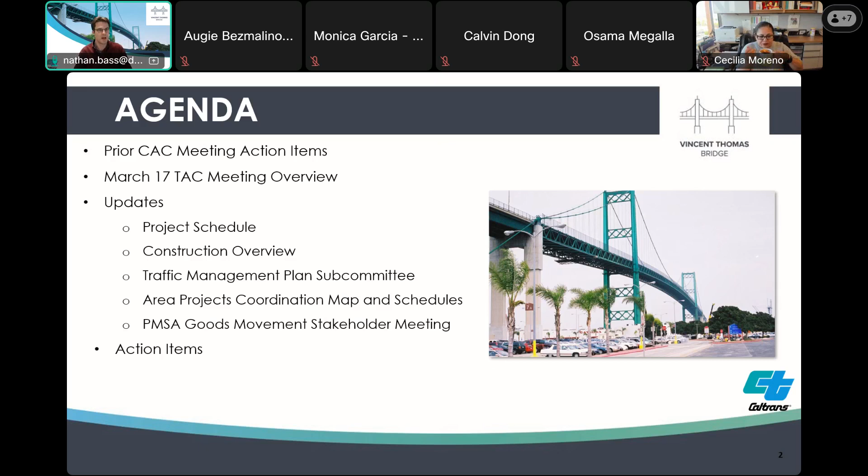So on our agenda tonight, we will do an overview of the previous CAC action items, as well as the last TAC meeting that we had back in March. As you'll remember, the TAC, or Technical Advisory Committee, is paused at the moment. As far as updates in our presentation tonight, we will discuss the project schedule, an overview of current construction and what's up ahead, updates from the Traffic Management Plan Subcommittee. We'll hear from Calvin Dong discussing the area projects, coordination map, and schedules. And I'll touch on the Pacific Merchant Shipping Association's Goods Movement stakeholder meeting series that is ongoing. We'll finish with the action items that are generated from this meeting.

The last meeting of the Community Advisory Committee did not generate any action items other than the normal uploading of minutes and recording to the project website.

The last TAC meeting back in March discussed several topics, including the open house series, which we concluded at the beginning of this month, the project schedule at that time, local street repairs that are planned for the project, the start of the pre-full closure construction, an overview of the construction schedule, again the Traffic Management Plan Subcommittee, project coordination map, and next steps for the TAC.

As I mentioned earlier, and as you are probably aware, the Technical Advisory Committee is on hold. It still exists, but we are not holding any meetings for that for the time being.

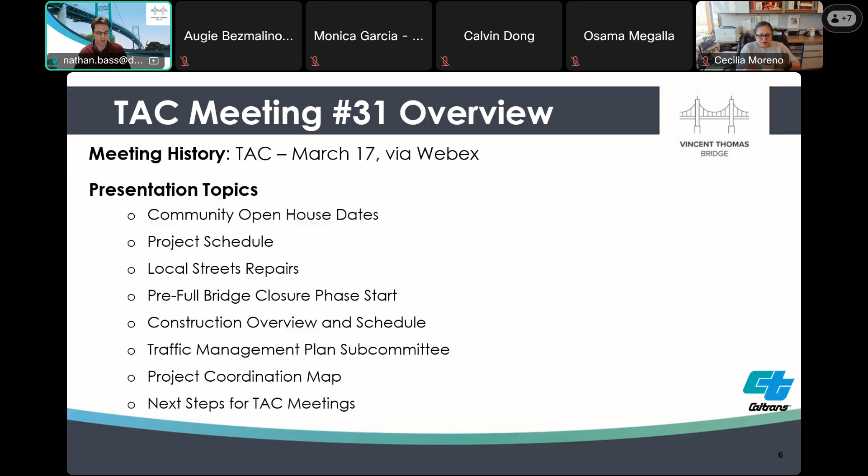So I'll ask Rimma to unmute and speak about the project schedule. Thank you, Nathan. So as you all know, Caltrans launched this project in February 2023 with the environmental phase completed in fall of 2024 and design phase completed in fall of 2025. We signed the construction contract with Skanska CEC joint venture this past January, and we're now fully into construction phase.

Construction work is divided into three parts: pre-full closure, full closure, and post-full bridge closure. Pre-full closure began in March, on March 23rd. We're currently on target to wrap this pre-full closure work by late October. The 16-month full closure remains set for November 1st, with the bridge scheduled to reopen in winter 27-28. Post-full closure is scheduled from winter 27-28 to winter 28-29.

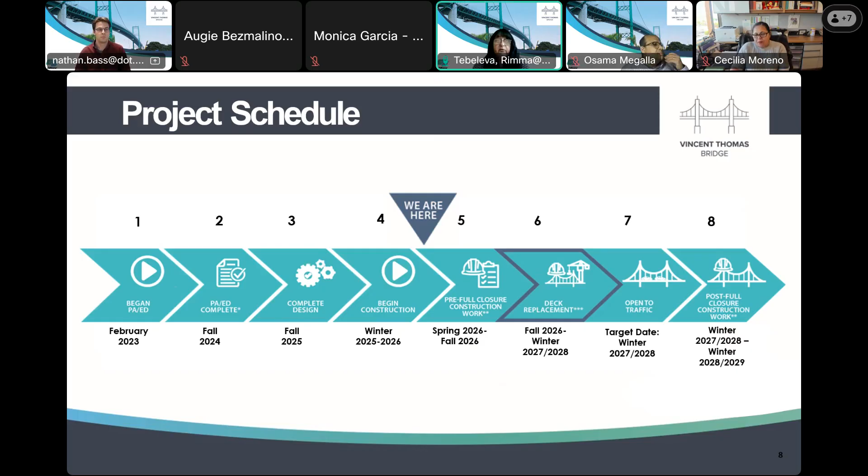And next is Andy Chen, our structure construction senior engineer, to talk in detail about all these activities. Thank you, Rimma. This is Andy Chen from Structure Construction Caltrans. For the next few slides, I'm going to talk about the construction, such as the stages and what kind of work we're going to do during each stage. So before I start, can everybody hear me fine? Diana, thumbs up? Thank you. All right, next slide please.

As Rimma mentioned earlier, there will be 3 stages for this project. The first one is the pre-full closure stage, for the preparation work. It will start from March 2026 to October 2026. At this moment, we already started this stage. The next stage will be the full closure stage, for the deck replacement. That will be from November 2026 to February 2028.

The last stage will be the post-full closure stage, from March 2028 to March 2029. The project contractor will be Skanska CEC joint venture. Due to the magnitude of this project, we need 2 contractors working simultaneously, and they are great contractors. Next slide, please.

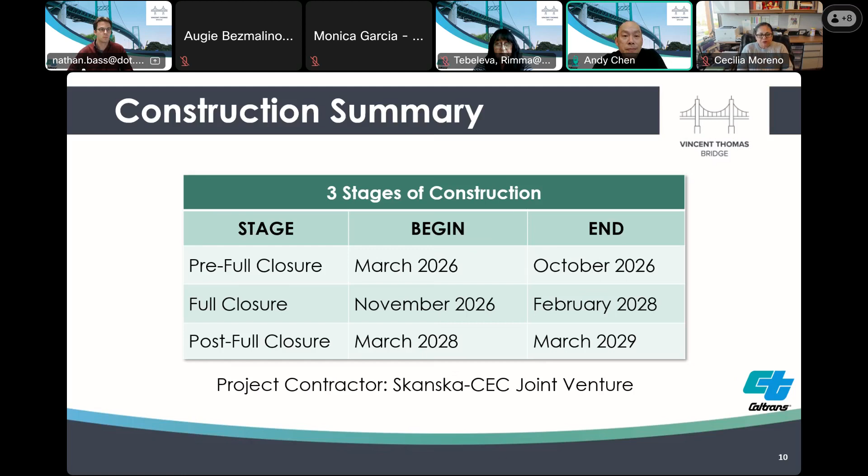So, okay, got it. Here are some of the major work we are going to do during the pre-full closure stage. It's from March 23rd, 2026 to October 30th, 2026. The first thing we're doing right now is installing the protective shielding.

The purpose is to protect the people and waterway underneath the bridge. Next stage, we will install the work platform immediately under the deck, so the worker has better access for the work.

We already installed 2 temporary stair towers as extra access points to expedite the work. Then we are going to install structural bracing, mainly to ensure the stability of the bridge, especially after the deck is removed.

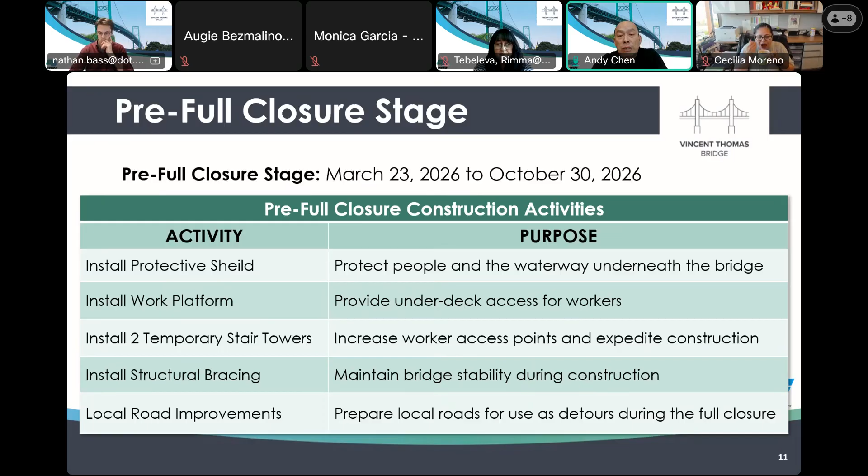Last but not least, we're going to resurface the local street for the detour route. Next slide, please.

So what kind of impact are we looking for during the pre-full closure stage? We will have overnight one-directional bridge closures from Sunday night to Friday morning. The week of March 23rd was Monday to Friday.

Westbound will be from 10:45 p.m. to 6:45 a.m., and eastbound will be 10:15 p.m. to 6:45 a.m. There will also be potential weekend bridge closures, depending on progress.

And local road will be closed for the resurfacing from mid-July to October 30th, 2026. We will provide closure notifications through email. Next slide, please.

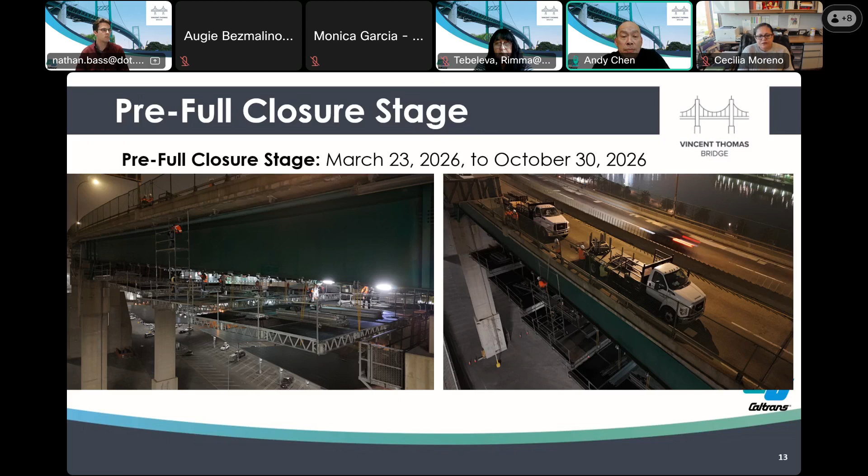As I mentioned before, we are going to assemble the protective shielding on the bridge deck. Once we reach a certain area, we will lift it with a crane, swing it outside the bridge, and hang it underneath. That's the actual picture of the work we are doing right now.

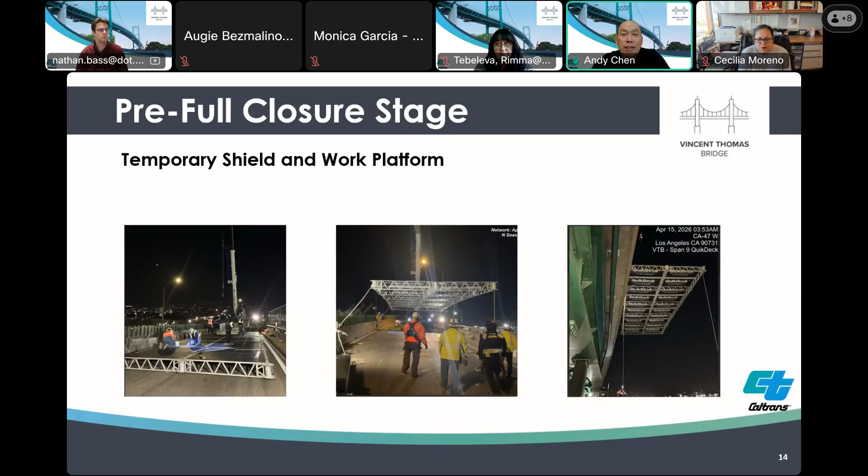This is what we have right now, looking under the bridge. Those are the protective shielding panels that we're installing at this stage. Next slide.

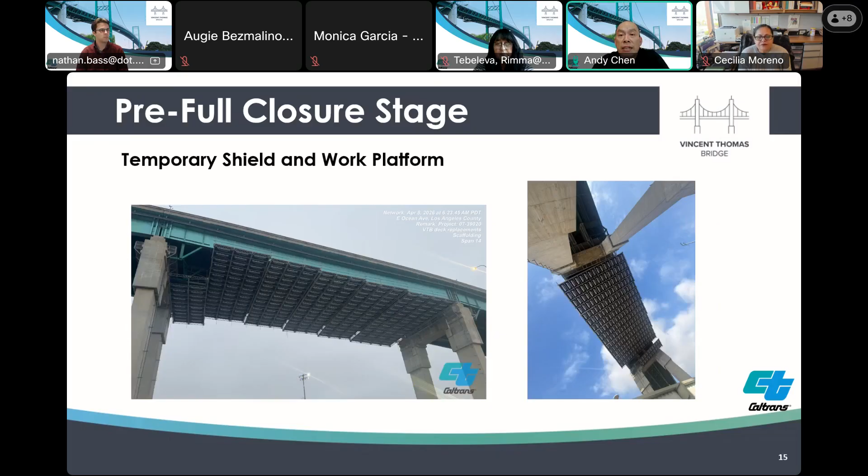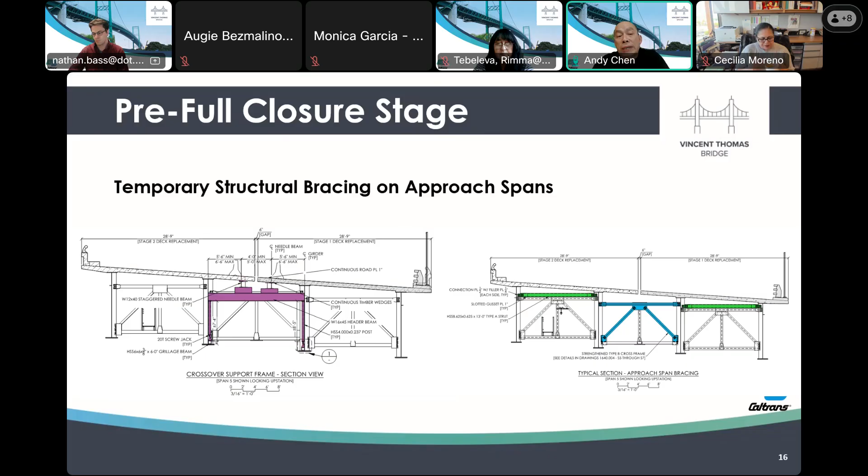As mentioned earlier, we are going to install the temporary structural bracing. The main purpose is to ensure the stability of the bridge, especially after the deck is removed. In the second half of this year, you'll see the actual bracing installed on the bridge. Next slide, please.

And we will finish all this before the full closure starts. Next slide, please.

So that was for the pre-full closure work. As for the full closure stage, as mentioned earlier, it will start from November 1st, 2026 to February 28, 2028. That will be 16 months.

During full closure, the entire bridge will be shut down to traffic, and we will focus on the deck replacement work. This will be 7 days a week, 10 to 12 hour shifts per day. Next slide, please.

These are the major work items during the full closure stage. We are going to replace the bridge deck, reconstruct the bridge railing, reconstruct the median barrier, reconstruct the drainage, replace the seismic sensor, and reconstruct the overhead signage. All of this work will be finished within 16 months.

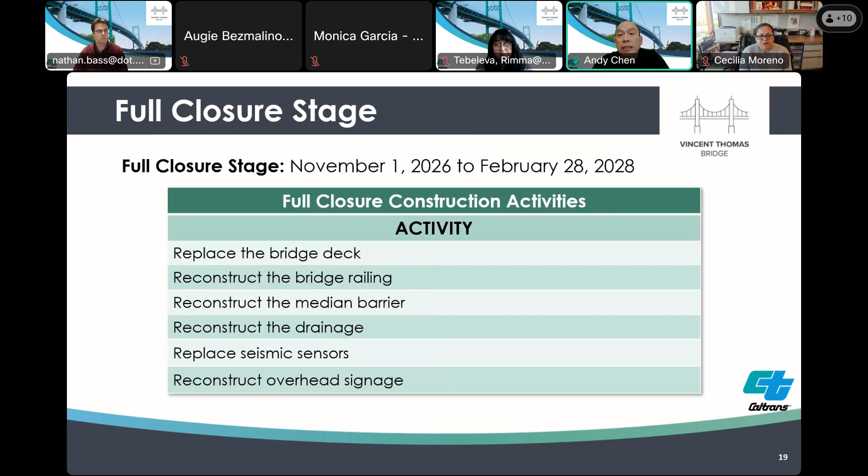Next slide, please. That was for the full closure stage. So right now we're talking about the post-full closure stage. This is the last stage of construction, starting from March 2028 to March 2029.

There are two types of work under this stage: permanent work and temporary work. For the permanent work, we're going to install the permanent under-deck utility supports, handle utility on those permanent supports, complete some punch list items, and install a new drainage system at the seismic joints.

As for the temporary work, we are going to remove everything installed during the pre-full closure stage, such as the protective shielding, access platform, stair towers, and the temporary structural bracing. Those are the work items for the post-full closure stage. Next slide, please.

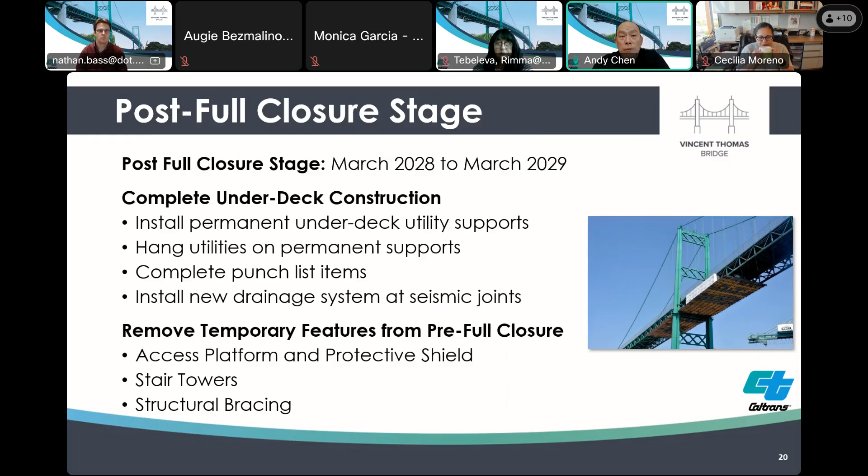As for the impact during the post-full closure stage, it will be similar to the pre-full closure stage, starting from March 2028 to March 2029. We will have overnight one-directional closures on weekdays. Westbound will run from 10:45 p.m. to 6:45 a.m., and eastbound from 10:15 p.m. to 6:45 a.m. So everything is exactly the same as the pre-full closure stage.

We also might have a potential weekend closure, depending on the progress of the project. Next slide, please.

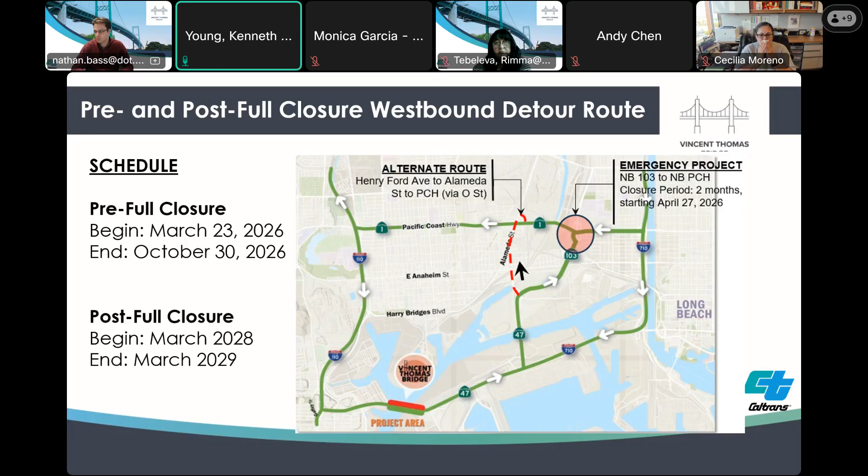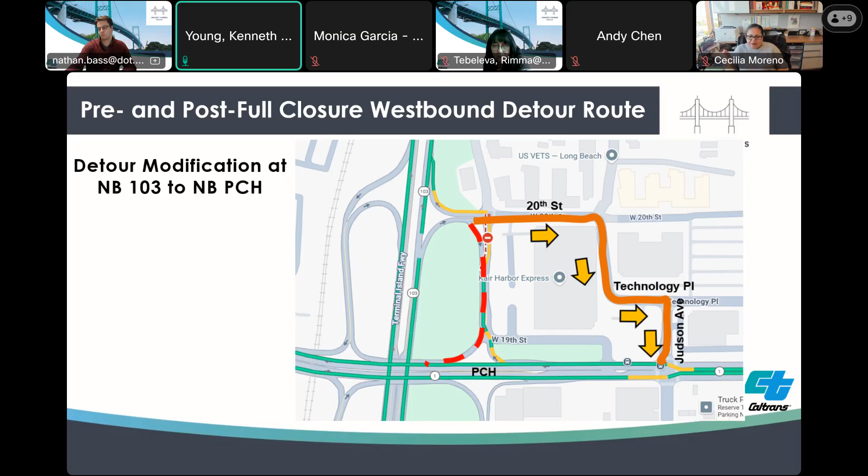As I mentioned, there will be a portion of the main line between these two - the northbound off and the northbound on - that will be closed for a duration of 1 month. And this connector will be closed for a period of 2 months starting this Friday. There's messaging out there in the field in terms of portable changeable message signs to speak of the work and the period of work. Next slide.

Once we finish work on the westbound end, then we'll transition to the eastbound. So in order for motorists to go from the San Pedro side to the Terminal Island and Long Beach side, they would utilize the 110 to PCH, to 103, to 47. The transition from eastbound PCH to 103 will not be impacted like the other side is.

In terms of the other side, I failed to mention that the emergency repairs relate to girder work - I think there was a vertical clearance issue where a truck hit a girder, which necessitated the repair. But in terms of the eastbound closure detour: 110 to eastbound 103, to 47, to Terminal Island, and beyond that motorists could take PCH eastbound all the way to the 710 and go to Long Beach or beyond.

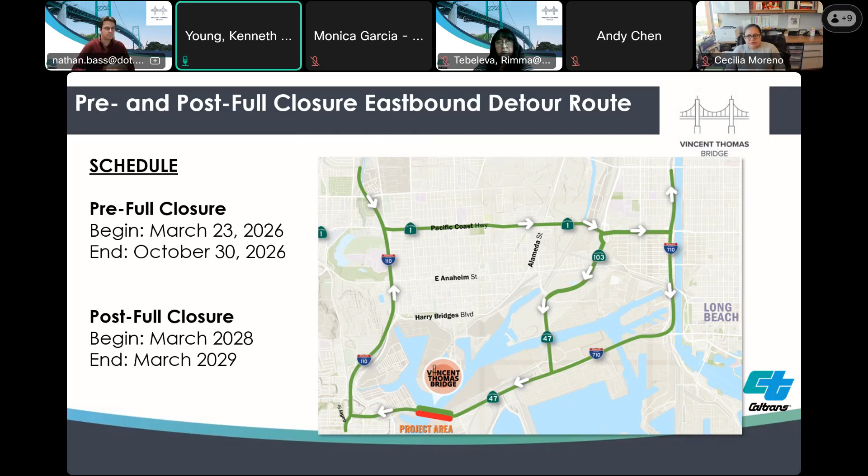Next slide. In terms of the full closure detour that will take place effective in November, the original detour was Harry Bridges, transitioning to Alameda, Anaheim, Henry Ford, and south on 47 to Terminal Island. We have extended that and provided an alternative route.

That route goes along Anaheim Street to 103. So one transitioning from Anaheim to southbound 103 can travel down the 103 to the 47 without any interruption, particularly to railroad operations, which will be a challenge in that area in terms of operations. Hopefully this alternative route, this extension, will help facilitate travel in the area. Next slide.

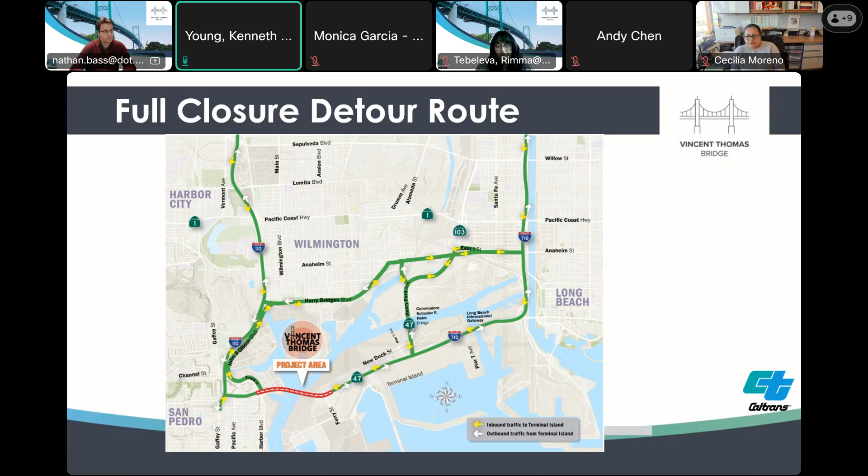In terms of traffic control officers, we have 18 locations. The plan remains, in collaboration with the city, to provide a full force of officers for the first 2 to 3 months, which will address the project impacts upon closing.

This will carry through to the peak period the port has as early as January. The city has put forth a motion to go beyond that, but we have a good plan, with some fluidity in terms of traffic control officers at the priority locations surrounding the detour. There may be ebbs and flows in location and shifts of traffic as we move forward in those first few months, so we'll remain adaptable to moving officers wherever needed.

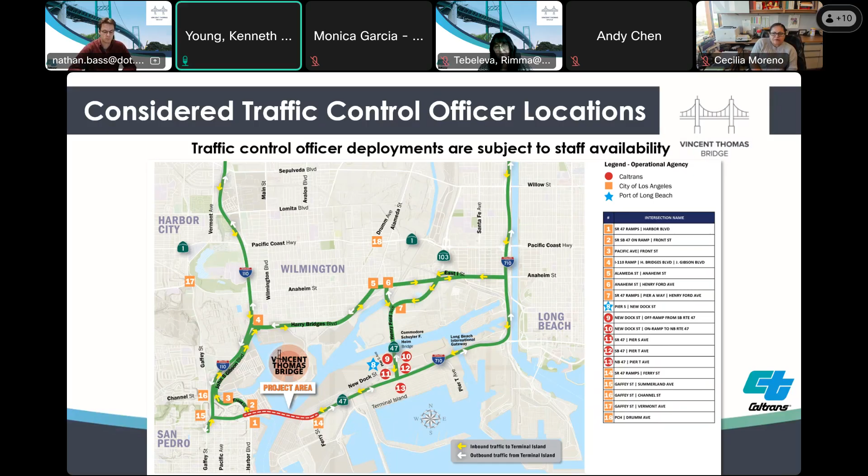In terms of local road improvements, expanding on what Andy mentioned, we will be providing capacity increasing improvements along the detour, in particular an additional eastbound lane on Harry Bridges Boulevard between the 110 and Access Road, just east of the TraPac building. We'll also be adding an eastbound lane on Anaheim Street from Alameda all the way to Farragut, connecting to the existing three lane section of Anaheim that carries easterly to the 710, providing a lot of continuity.

Additionally, we're taking the opportunity to provide additional storage where needed, in particular on westbound Anaheim at Alameda left turn movement, where we're increasing storage in anticipation of additional demand once the full closure arrives. Next slide.

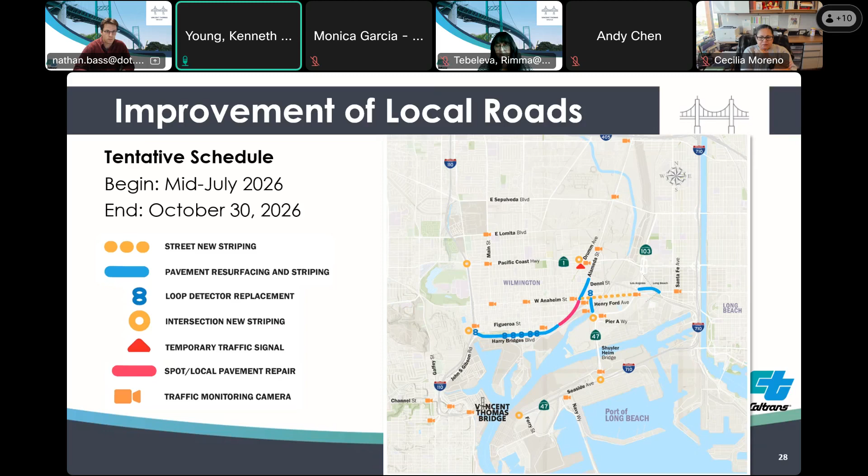In terms of camera locations, the existing locations are represented in black, and we've made tremendous strides, getting to the point where we're at 90% health. If you utilize our Quick Map app, our project app, in many of those locations we've represented still camera shots at time intervals at each location.

We've progressed to providing live stream video on many of these cameras, so you're able to see live feeds. Beyond that, our construction team has assisted us in installing what we're calling Earth Cam cameras, represented in magenta, in or about the areas, which will help us provide the necessary traffic surveillance.

Before that full closure arrives, in coordination with the city, we'll be able to install many of the cameras that are in orange, so we'll have a more global look at the area of impact.

Above and beyond that, we'll have what we call AWIS, the Automated Work Zone Information System, that will allow us to detect traffic conditions and change the messaging to motorists in real time. So we'll be able to tell motorists there's traffic jammed ahead, use an alternate route, or whatever it may be, so motorist travel interruptions are minimized.

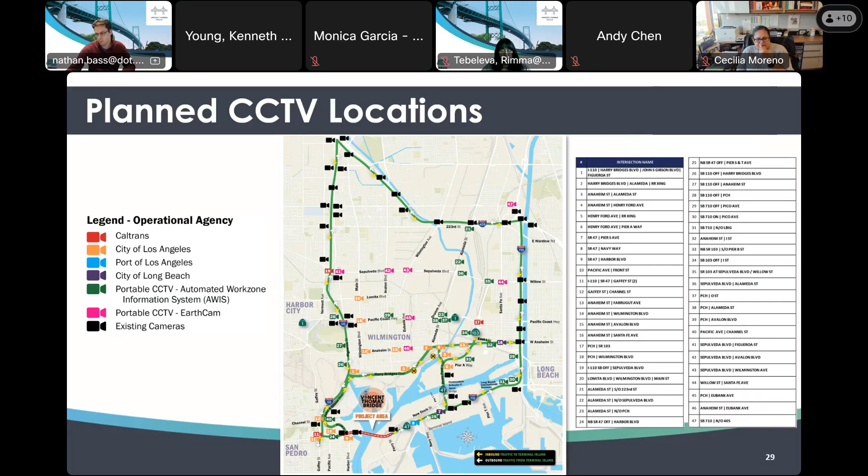Next slide. I think that may be it. Back to you, Nathan. Thank you, Ken.

I wanted to say I saw Augie's hand come up right at the end of the construction schedule overview, when Ken was getting started. So if you had a comment or question, Augie. Yes.

The first gentleman talked about signage updates on the Vincent Thomas Bridge. I was thinking the San Pedro and LA waterfront area is very dynamic right now, it's changing. Over the years there's been additional signage added when coming from Long Beach to San Pedro, for instance the Battleship Iowa was added as a sign on the Vincent Thomas Bridge. Is there a way we could see the signage plan for both directions? Maybe have a meeting on that upcoming, but I'd like to get a copy and be able to comment on it, since San Pedro's changing a lot right now and their waterfront's changing. I'm hoping we don't make a mistake before the bridge opens, and maybe we can make some comments on the signage.

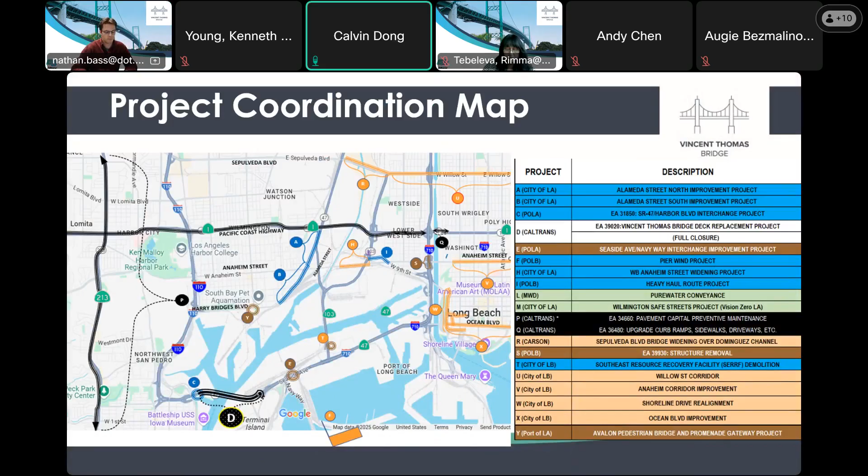Hi, yes, this is Calvin Dong with the Office of Mobility Programs again. We haven't had any major updates to the project scheduling since the last time. The last update was the Avalon Pedestrian Bridge and Promenade project. We'll continue to monitor for any additional projects that may occur along our detour route and around the project, but at this time there are no major updates. I believe that's it for us. Thanks.

And here is an enlarged list of those projects. Item letter Y at the very bottom in brown is the most recent addition.

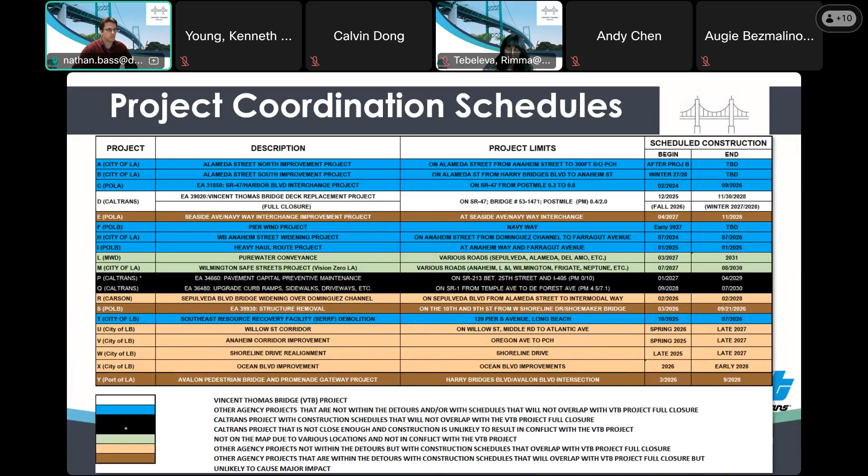Regarding the Pacific Merchants Shipping Association Goods Movement Stakeholders Meeting, that was originally scheduled to occur this week, but it was postponed until next week. We gave you an update about the happenings of the March meeting at the last CAC, and we will update you on anything going on in that Goods Movement Stakeholders Meeting group during our next CAC.

So I want to thank Augie for that question. Is there anybody else from the audience that has a point for discussion?

One other thing, Nathan, and thank you for putting on these meetings. I truly appreciate it. I do something similar at the Port of Los Angeles. I know how exhausting this could be.

Just one other comment. Last month I wasn't quite sure if the meeting was taking place or not. For a number of months you were giving us a reminder a little bit before this meeting, just saying hey, we're having a meeting and so on. I wasn't quite sure because I didn't get that reminder last month, so I didn't log in. Maybe a reminder a couple of days before, since it was such a light attendance tonight, would help people know the meeting is still occurring, and you'll probably get better attendance. I really appreciate this, it's very helpful, and thanks for doing it.